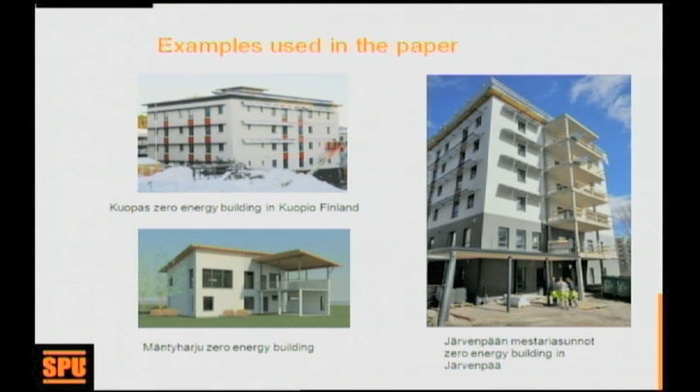I will present shortly a case study, an example of implementing a near zero energy building in Finnish climate conditions. Here you will see 3 examples of such buildings that have been recently implemented here in Finland. All of them are described in my full paper, but I will now concentrate, for the sake of time, on the Kuopas building, which you see here on this picture in the upper left-hand corner. That building is an apartment block building, apartments for students.

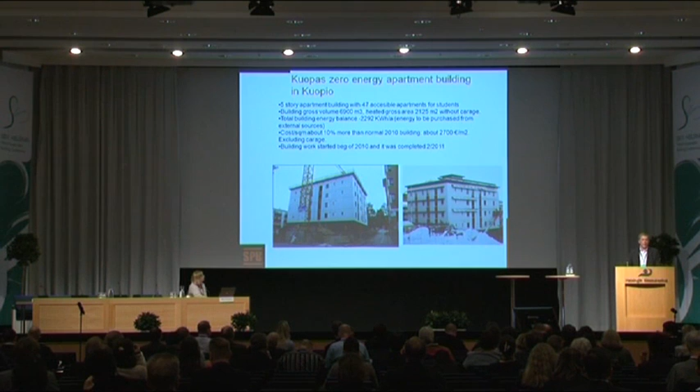It's a reasonably large building to be a pilot building, but in any case, the cost of implementing this building was 2,700 euros per square meter, about 10% above what we would typically have in Finland for a building which fulfills the current building code. So that's what the building is like.

I will just briefly talk about the structural solutions used here. It's a very typical Finnish apartment block building: concrete sandwich element walls, hollow slab roof, in principle very similar to many apartment block buildings in Finland today.

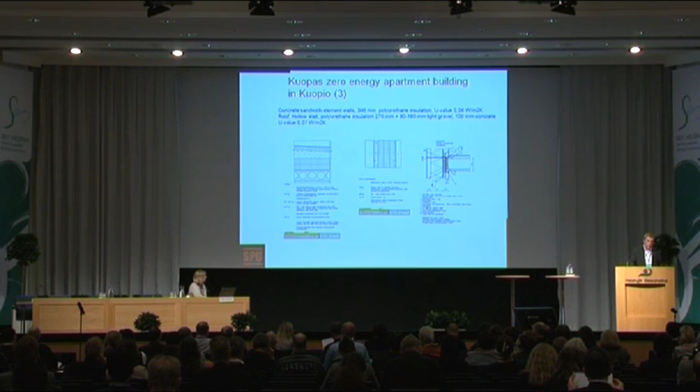The difference here is that the building envelope has extremely low U values. The roof has 0.07 and the walls 0.08. The air tightness of this building was measured to be less than 0.4 times per hour. Typical structures, the insulation material used here is polyurethane, to keep the structures reasonably thin and also to achieve good hygrothermal performance of the structures.

There you see a couple of pictures from the building site when the elements were installed. Typical sandwich elements, as you see there on the left-hand side picture.

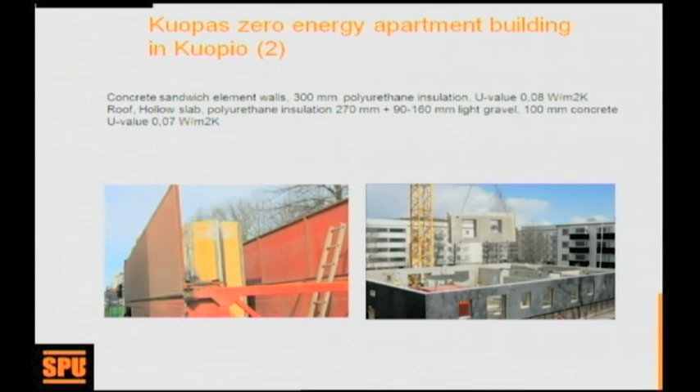Now, how does the building then produce energy? It has a little bit over 100 square meters of photovoltaic panels and 125 square meters of water heating solar panels. In addition to that, it's using geothermal energy wells - and you did hear that right, it's not using heat pumps, it's using energy wells to preheat the incoming air during the winter time, and then cooling the air during the summertime.

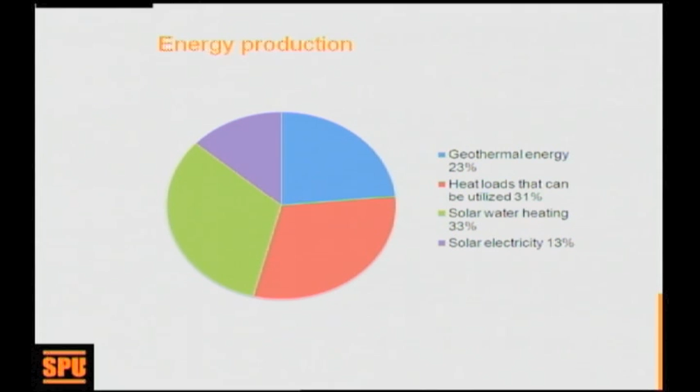The total energy balance of this building is a little bit less than 2.3 thousand kilowatt hours per year, and this building was implemented in an environment where the annual average temperature is less than 3 degrees. So it's a reasonably harsh environment for building a zero energy building.

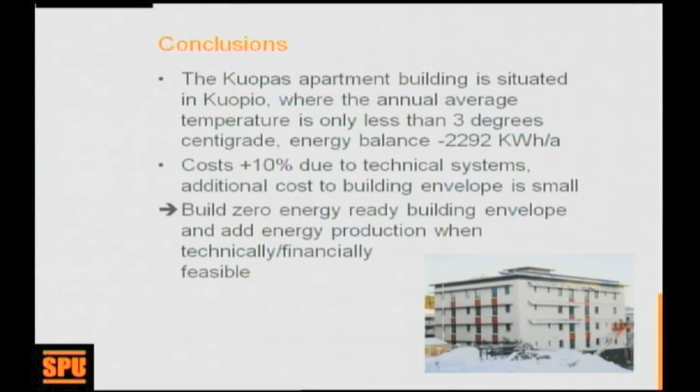Costs, which we are all of course concerned about, were in these pilot buildings about 10% more than in a typical building for similar purpose implemented in Finland, and mainly this is due to the technical systems, i.e. the energy production on site.

What I would suggest from the study of these buildings and a number of other buildings is that most of the cost when we implement zero energy buildings today goes into the energy production, implementing the energy production on site.

So I think some of the considerations we should put into is producing renewable energy for building groups or smaller areas, and also for the fact that the energy production could also be introduced in a later stage for these buildings. Make the building envelope capable to support zero energy building, but if there is a lack of financial resources in the building phase, implement the technical systems to produce electricity and other energy in a later stage.

So that would be my conclusion from here. But as said, these buildings were implemented over the last 2 years in Finland, and I hope that we will have more experience also from the actual users of these buildings to tell in the next conference. Thank you.

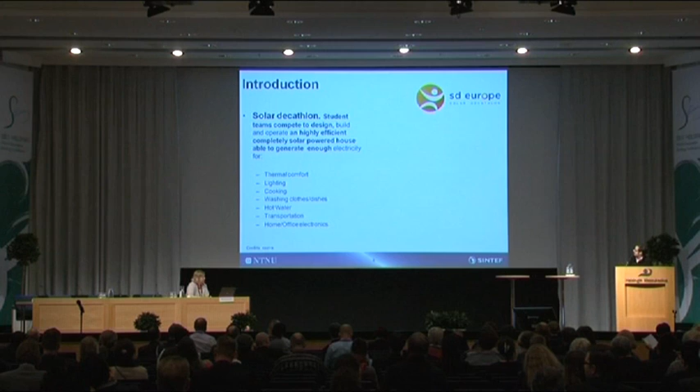The aim of this competition is developing a prototype that is energy positive, thanks to the integration of different photovoltaics, but also satisfies a whole bunch of different requirements.

In the Solar Decathlon, students compete to produce a highly efficient, completely solar-powered house, able to generate enough electricity for all kinds of domestic activities normal in any house. It provides thermal comfort and sufficient lighting requirements, but also the students, when we're there next year, will have to wash clothes, invite people for dinner, and do a whole series of things like it's a real, normal house.

The house will be evaluated under 10 different contests. The energy balance, which I'm going to speak about today, is just one of the different requirements under which the house will be evaluated. In the energy balance and solar systems category, but the jury will also evaluate aspects like the architecture, the aesthetics of the house, and also the communication and social awareness — how the project was used to increase social awareness about the use of photovoltaic technologies, and the strategy used in the competition.

As you could imagine, the house we were asked to develop should have been market-ready for our country — a Scandinavian house somehow — but should have been able to perform optimally in Madrid, meaning a completely different climatic context.

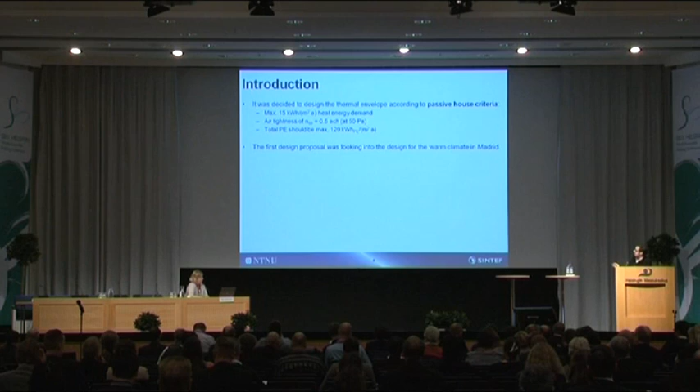We started designing the house looking at the passive house standard requirements, and as a first step we tried to understand how the house could perform according to passive house standards specifically in Madrid. Here are the requirements we had: 15 kilowatt hours per square meter of heating demand and cooling demand, and a total energy demand of 120.

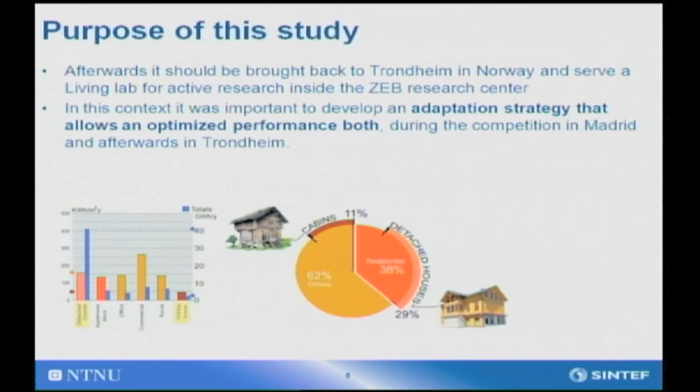The main challenge was that after coming back from Madrid to Trondheim, the house will actually be used next year as a research living lab for ZEB, the Zero Emission Building Center. So the adaptation strategy for allowing optimized performance was crucial.

The other difficulty came from the requirements of the competition, like the fact that we were dealing with a really narrow comfort zone — we're asked to maintain comfortable conditions between exactly 23 and 25 degrees centigrade, and relative humidity between 40 and 55 percent. If we want to score points next year competing with other universities, we have to stay within this range of values, so the challenge was pretty high.

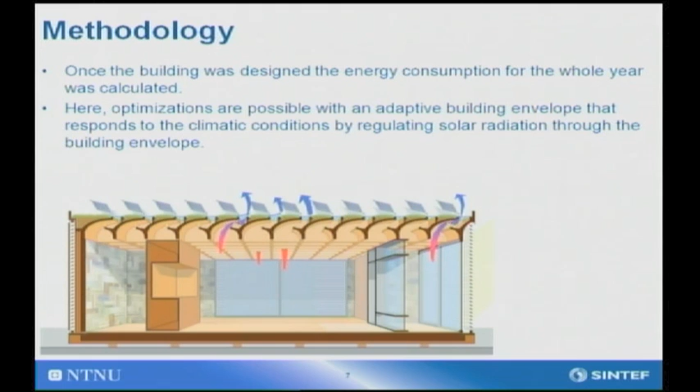The methodology used in the architectural design was to design a building characterized by different layers — a multi-layer envelope that could work in different ways according to different seasons.

When we performed the calculations, they satisfied the passive house requirements in Madrid, but didn't satisfy the passive house requirements in Norway. So we started applying an adaptation strategy following the Kyoto pyramid: first reduce heat losses through the windows, then maximize solar heat gains, then reduce the transmission losses through the walls, floor, window, and roof.

That means Matthias defined 4 different models with 4 different groups of parameters, which I'm going to run through and then go back to — these ones.

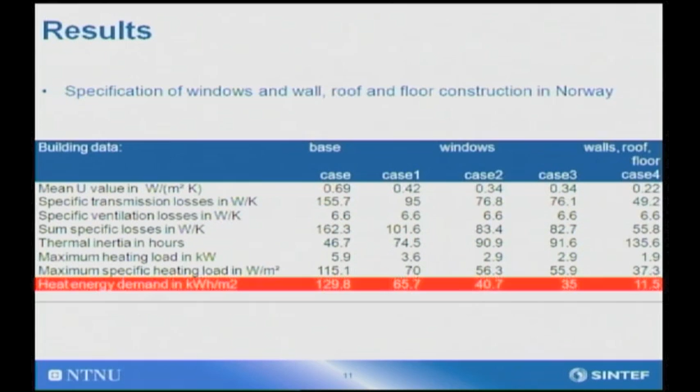So these were the parameters used for the simulations in Madrid, and then 4 different groups of new parameters for the Norwegian context with more and more stringent envelopes. The U value was going down and down until reaching the mean U value of 0.22. For more detailed values, you can refer to these tables. But basically, for the Madrid building we have a U value of 0.25 watts per square meter Kelvin.

And then air tightness was down to 0.07, and so on. So I'll just spend a couple of words on the concept. As I told you, the main idea was to have somehow a really regular box. Now the project has slightly changed, but this was the original idea, characterized by high mobility of the external envelope. We had 3 different layers of devices, and all of them were movable. The first one was characterized by a shading device and also movable insulation, and the most internal layer was also able to translate in this direction.

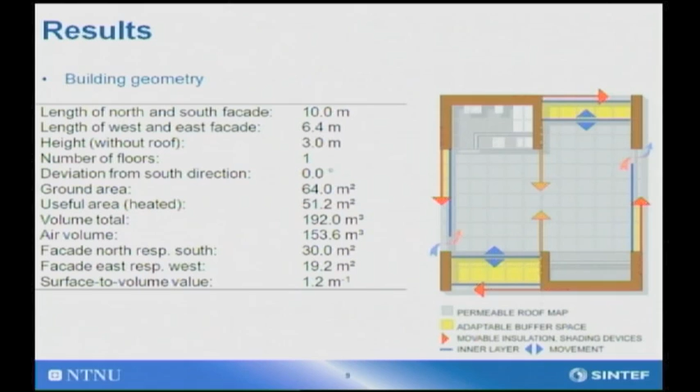In this way, we were trying to solve the contradiction of having a passive house, Scandinavian performance that was also asked to work in Madrid. Basically, we were somehow cancelling this layer when we wanted a greenhouse effect, or moving this one here when we wanted a double skin facade, etc. But obviously this was constructively really complicated, so now we are moving to another kind of stage. If you want to know more about this project, please ask us — I don't want to take too much time now to go through all of it.

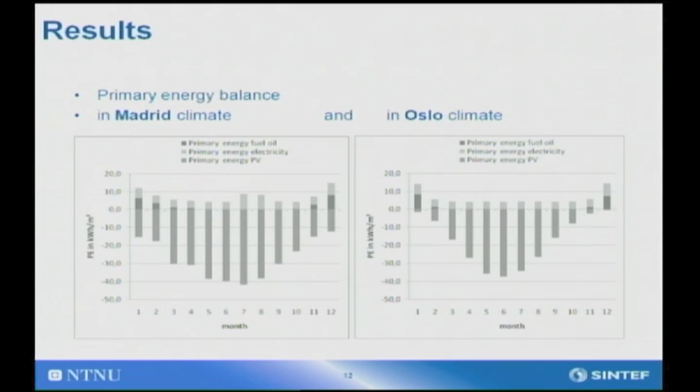But anyway, the prototype showed that it's possible to have energy positive buildings also in this climate. I'll just mention that the maximum power of the photovoltaic systems applied comes from the competition requirements — we have a 10 kilowatt maximum power all around the year. And then let's go on.

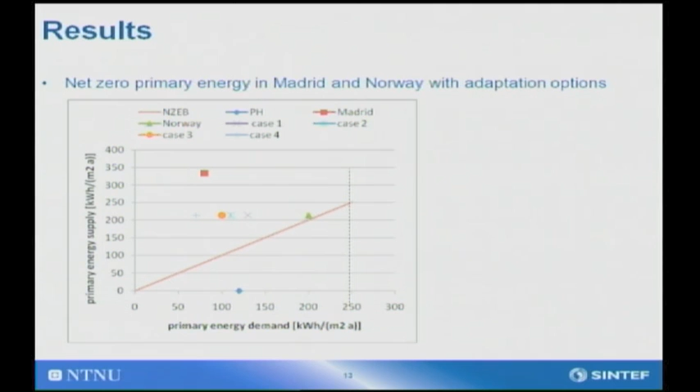So if we try to summarize these results into a final diagram, this is what happened. 120 is the limit we had for passive house requirements. This one is the Madrid building, and as you can see, here we have the energy supply coming from the PV, and here the energy demand. So we are still always inside the 120, and we have a pretty high production thanks to the PV integration. This line you see here at 45 degrees represents net zero energy, so basically it's when the demand balances the energy production.

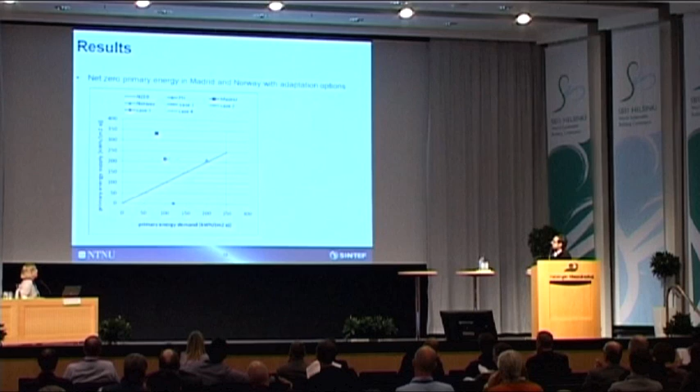So all 5 buildings that Matthias analyzed here — 1, 2, 3, 4, 5 — are somehow over the line. But there is one, the first case, where the envelope of the building was not yet that stringent, so it doesn't yet satisfy passive house requirements — that's this one. All the other 3 that were simulated do meet passive house requirements, but obviously the result for the Norwegian context is that the most stringent one, the one with the lowest U value, is the most efficient one.

So, I don't know if I'm running too much. Didn't calculate — no, it's okay. So a little bit about the conclusions.

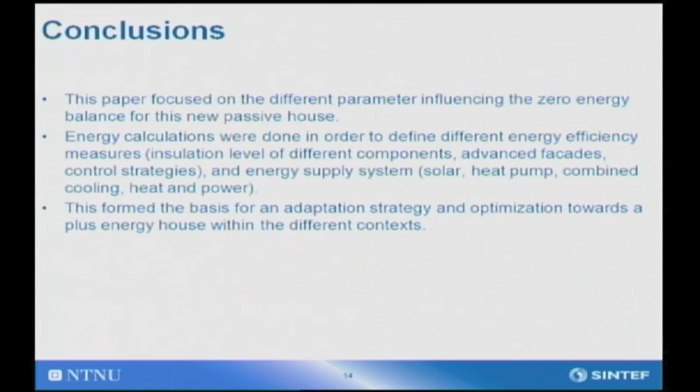The energy calculations done here focused somehow on 2 systems: one is the envelope system, so the characteristics of the envelope and the U values, the degree of insulation, and the other is the energy supply system. This formed, as I told you, the preliminary set of analyses done with the original concept. Now we are in the 4th stage of development of the project, so there is a new set of analyses that have been done also with other software.

And the results show that it's indeed a challenge, designing a house that performs in both contexts, satisfying passive house requirements in both of them. It's difficult, but what I want to stress a little more is that these final two lines are really interesting for us, also according to what the Solar Decathlon competition asks us to promote.

So it's like that the results indicate that solar applications integrated with other energy supply technologies should be further developed for the Norwegian market until they provide cost-effective solutions. What we are trying to show in our project is that there is a marginal applicability of these photovoltaic systems even in cold climatic contexts or where the solar angle is so low.

So that if we respect somehow passive house requirements for the energy demand, we can still have an energy balance all along the year. There are some discussions behind that, also with the provider of the PV panels, but we're working hard. This would represent a helpful result for the development of passive houses and net zero energy houses in our context. That's all.

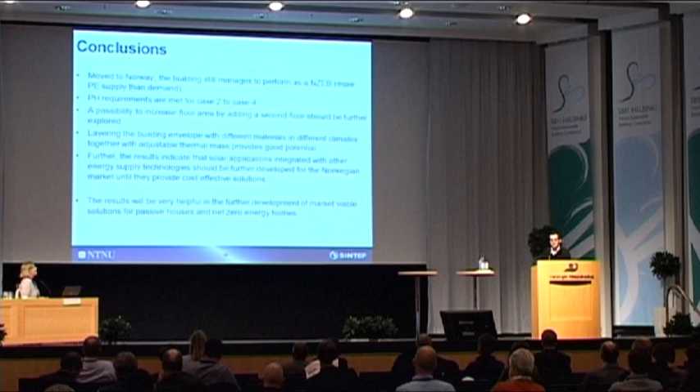Sorry, that's really interesting. It looks like the graphs show it's... Yeah, thank you, thank you. Can you all hear me?

That was a very interesting presentation, and it seems to me that the building in Madrid is much more challenging than the building in Norway, Trondheim. Presumably you've got active cooling specified. Could you just say something about the cooling systems? Because it's important to know how it's cooled in Madrid and how it's kept warm in Norway, and whether it's the same system.

Yeah, obviously, as you said perfectly, the requirements are completely different due to climatic context. So obviously in Madrid we have much more stress on the cooling and shading devices. On the other hand, in the Oslo climate, we have much more stress on limiting the thermal losses through the envelope. So that's a completely different approach.

But the point is that for Madrid we now have a slightly different strategy for solving this contradiction compared to what we presented. The focus on Madrid is having a hybrid system. Basically the thermal comfort zone is so small that it's not really easy to predict if the external condition, even if we are in September, will be inside that specific parameters.

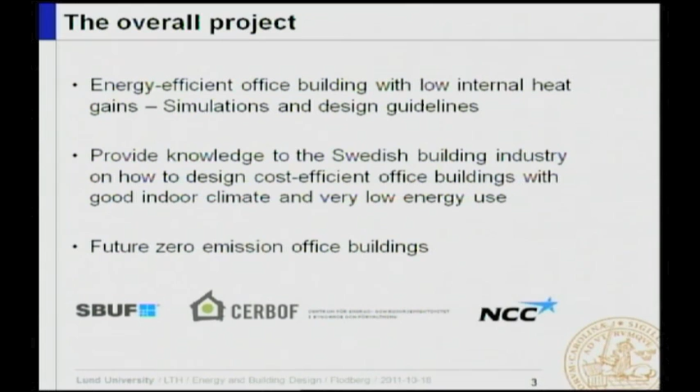Marie-Claude and I work together in a Swedish research project called Energy Efficient Office Buildings with Low Internal Heat Gains, Simulations and Design Guidelines. The overall purpose of this project is to provide knowledge to the Swedish building industry on how to design cost-efficient office buildings with a good indoor climate and very low energy use. We believe this is a first and important step for developing future zero-emission and zero-energy office buildings. The project is financed by the Swedish building industry, the Swedish Energy Agency, and a large construction company in Sweden called NCC.

The objective of this simulation study is to investigate the daylight potential in single office rooms in the Nordic countries, that is, countries at high latitudes. We want to see the potential for electricity saving for lighting, and the goal is to provide guidelines for architects and engineers.

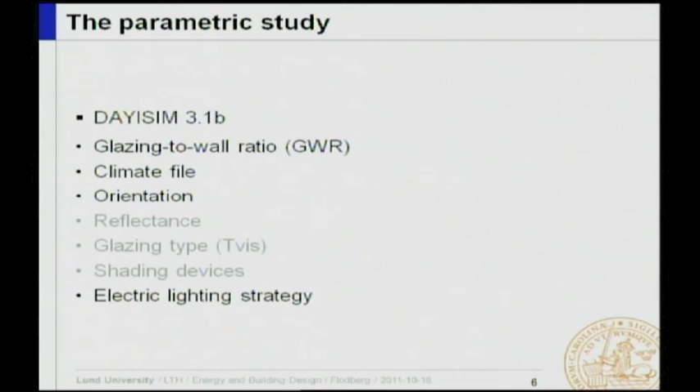In this parametric study and simulation, we use the simulation tool DaySim. In DaySim we can change parameters such as the glazing to wall ratio, different climate files, the orientation of the room, the reflectance of the inner surfaces, the visible transmittance of the glazing, different shading devices, and the electric lighting strategies. The ones in black are the results I will give you today.

First, we modeled a base case in DaySim: a single office room in Stockholm, facing south. In the base case, the glazing on the wall is 30%, and the visual transmittance is 72%. The reflectance of ceiling, walls, and floor are 80%, 70%, and 40% respectively. We assume the office room is occupied from 8 to 5 every weekday.

In this picture, you can see the different illuminance sensors placed in the room. The distance of 1.5 meters from the window is the preferred sitting zone.

In this study, we analyzed the continuous daylight autonomy, which is a factor of how much available daylight you have in a room compared to the required illuminance. For instance, if we want 500 lux in the room and we have 400 lux from daylight, then the daylight autonomy is 80% for that time step.

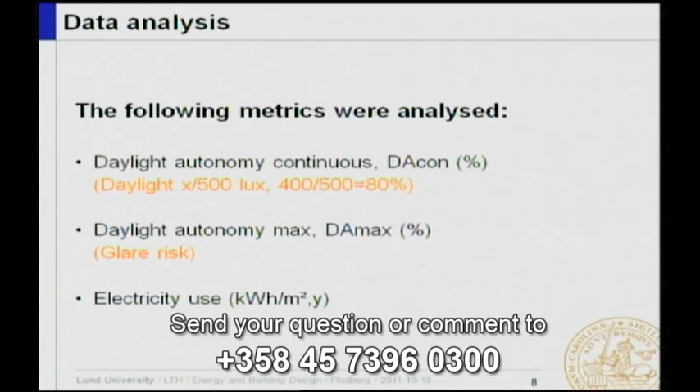We also studied the daylight autonomy max, which is the percentage of time during a year when we have too much daylight in a room, posing a risk of glare. We should keep this below 5%. We also studied the electricity use for lighting systems.

I will now try to guide you through some of Marie-Claude's results. Here you see the daylight autonomy as a function of glazing to wall ratio at different distances from the window. I want you to concentrate on this gray curve.

As you can see, the daylight autonomy increases sharply from 10 to 30% and then stabilizes. At 30% glazing to wall ratio, we have 78% daylight autonomy, which is at the borderline between good and excellent.

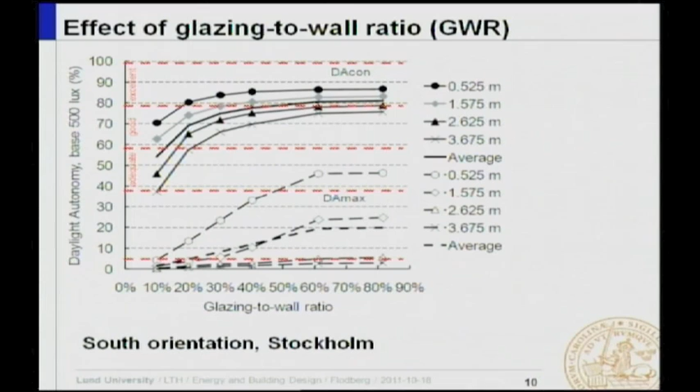If we look at the glare risk down here, remember we don't want glare risk more than 5% of the year. Above 20% glazing to wall ratio for this preferred sitting zone, 1.5 meters from the window, we will have a glare risk and will need shading devices.

We also investigated the effect of climate in relation to glazing to wall ratio. This study included Montreal and Quebec, which are at a lower latitude than the Swedish cities Stockholm, Gothenburg, Malmö, and Östersund. In Quebec and Montreal, we have more daylight benefit in the room, actually excellent, but we have good daylight in the Swedish cities as well.

The differences between Gothenburg, Stockholm, and Malmö are negligible, but in Östersund, further north of Stockholm, we have a little bit more limited daylight, though still quite good.

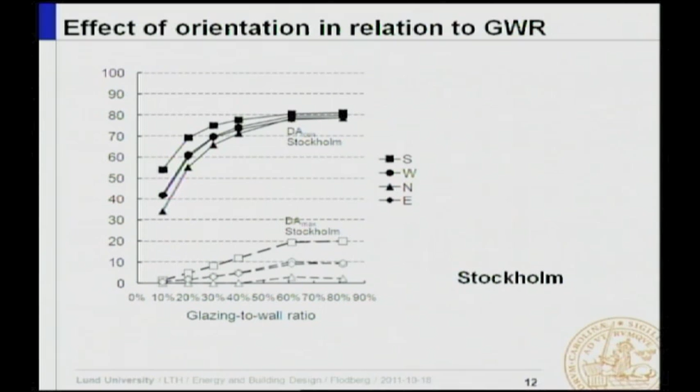This graph shows the effect of orientation of the room. As expected, we have more daylight in the south orientation and less in the north orientation, with the same daylight amount in the west and east directions.

Looking at the glare risk, remembering the 5% limit, at the south facade we have a glare risk already at 20% glazing to wall ratio, but at the west and east facades it's at 30%, and at the north facade we can manage without shading devices.

This is because the occupancy sensor turns the light on every time you enter the room. So between 8 o'clock and 5 o'clock every day, the lights are turned on even though we have enough daylight. Instead of an occupancy switch-on-and-off system, we should have an occupancy switch-off system, which turns the light off when we walk out of the room, and when we enter again we manually switch the lights on.

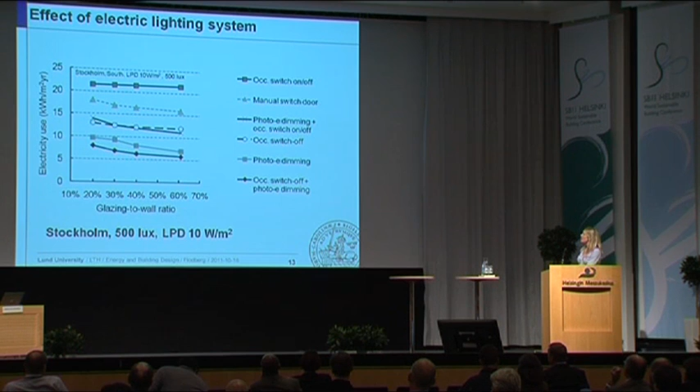If we have enough daylight, we won't switch on the lighting, and we will save energy. The best control strategy is to combine this occupancy switch-off with a photoelectric dimming system, which adjusts the lighting. If we have much daylight in a room, we can dim and adjust the lighting electricity.

And I will end this presentation with some main conclusions from this study.

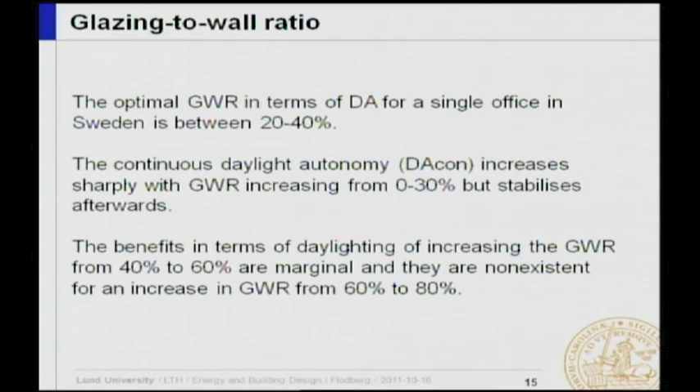The optimal glazing to wall ratio in terms of daylight autonomy for a single office room in Sweden is between 20 and 40%. The continuous daylight autonomy increases sharply with glazing to wall ratios increasing from 0 to 30%, but stabilizes afterwards. The benefits in terms of daylighting of increasing the glazing amount from 40 to 60% are marginal, and they are non-existent for an increase from 60 to 80%.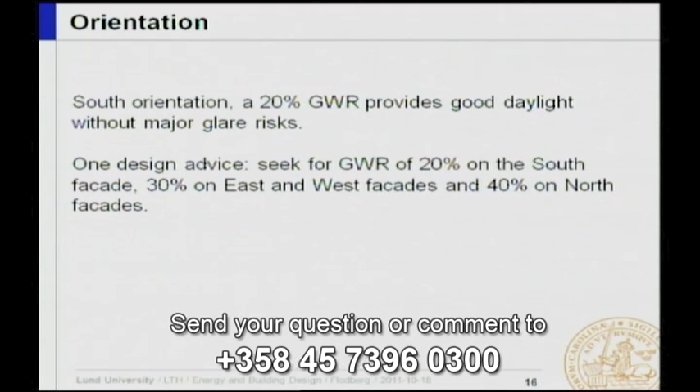At the south orientation, a 20% glazing to wall ratio provides good daylight without major glare risks. One design advice is to seek glazing to wall ratios of 20% for the south facade, 30% for the east and west facades, and 40% for the north facade.

Daylight autonomy is more limited in the Swedish cities compared to cities at lower latitudes like Montreal and Quebec. But it is still possible to achieve good to excellent daylight design with reasonable glazing to wall ratios in Sweden.

There are negligible differences in daylight autonomy between the three largest Swedish cities, and Östersund has a slightly more limited but not significantly lower daylight autonomy than Stockholm, Malmö and Göteborg.

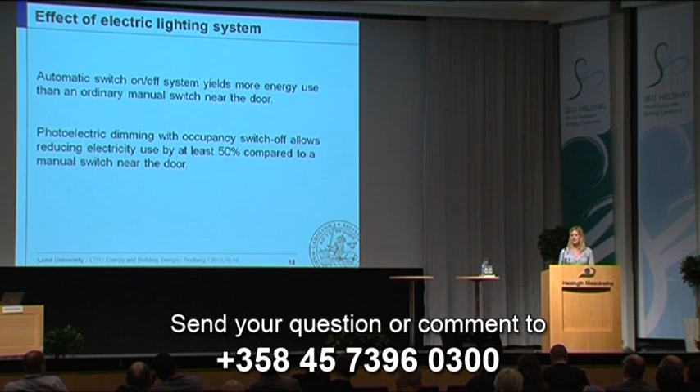A more detailed journal article will be presented in the next issue of Lighting Research and Technology. If you have questions about this and want to know more detailed results from this study, please don't hesitate to contact Marie-Claude Dubois at this email address. Thank you.

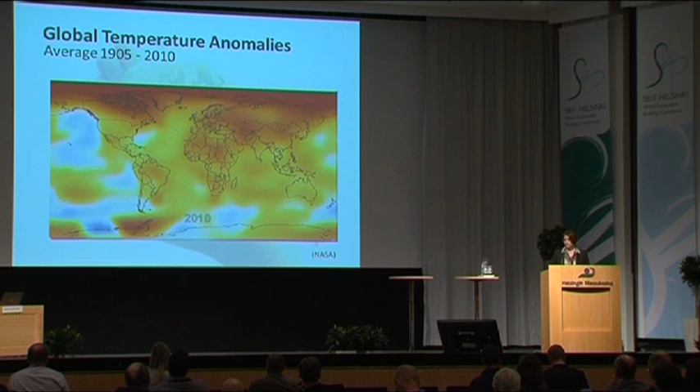So the greenhouse gas effect has resulted in the increase of global temperature all over the world. And if we continue like this, this will cause serious implications on Earth. So this will threaten life on Earth.

And the major gas contributing to the greenhouse effect, as we all know, is CO2, carbon dioxide, resulting from the burning of fossil fuel to generate energy for different buildings. As we can see here, domestic buildings are the major contributors to carbon emissions in the UK.

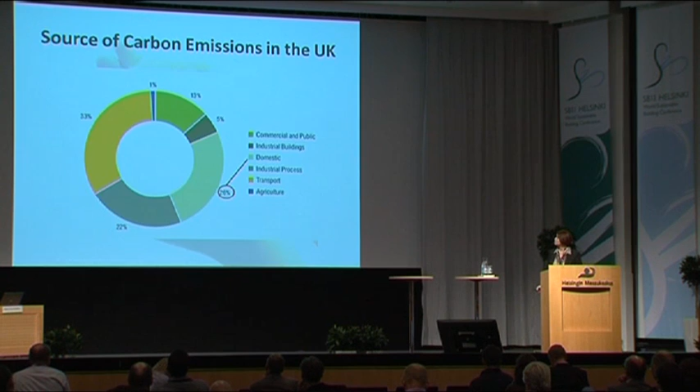This is because of the use of burning fuel to generate electricity, which has resulted in buildings becoming energy inefficient, because of the mass exploitation of fossil fuels.

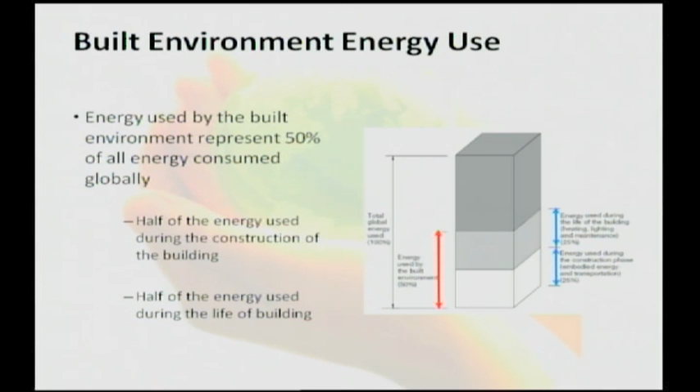In the built environment, 50% of the energy used is used by buildings, whereas 25% is used during the construction phase, and the remaining 25% is used during the occupancy phase.

The major components causing CO2 emissions are the materials used, over-ordering of about 10% of material, and consequently waste. This has led to buildings being a commodity-led, demand-led property, constructed with shorter lifespan, and dominated by mechanical, electric, and electronic equipment.

So the built environment, we've all agreed, has a lot of problems, and these problems have been well documented in literature. In order to mitigate these problems, too many separate yet overlapping initiatives have been introduced, and this has led us to question the credibility of those initiatives.

What is the construction industry supposed to be doing? Is it supposed to be following this initiative? And if it's not following it, is it neglecting the other one, or what?

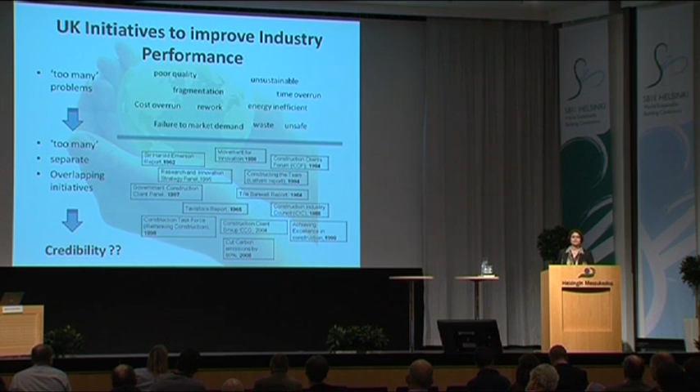One of these initiatives is changing the perception of the building as a commodity and looking into more sustainable features of the building, which determine the worth and the market of the property.

And one of these initiatives is the initiative by the UK government to cut carbon emissions by 80%, which is quite ambitious.

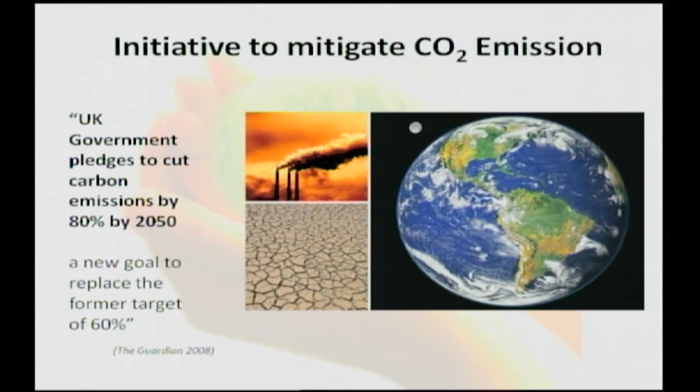That means using renewable energy technologies with different features, whether solar, wind, or biomass technologies, where biomass represents the major source for renewable energy.

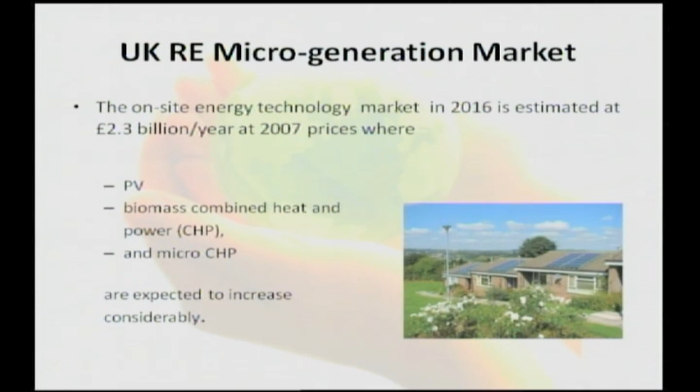The microgeneration market in the UK is anticipated to be dominated by photovoltaics, and biomass combined heat and power, CHP, are expected to increase considerably.

Okay, how do we perceive renewable or energy efficient buildings integrating renewable energy technologies? This has been well documented by Louis Hellman back in the 80s, and to some extent it hasn't really changed a lot nowadays. It depicts the developer as perceiving these buildings as funny - they take longer to build, are not cost effective, and in the end will go wrong.

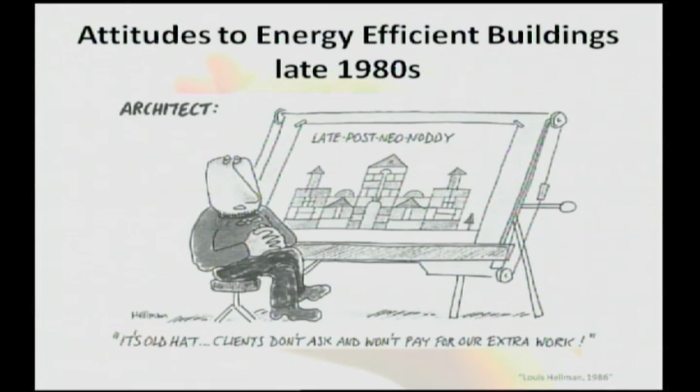The architect, since the developer will not pay for the extra work, is not bothered about integrating these because they're not going to get paid for it. As for the landlord, the rent won't rise because of using these technologies, and they pass on the electricity bills to the tenants, so they don't see themselves as involved.

And the tenant - they don't want to waste their time saving peanuts on energy. And finally, the people in the work environment would perceive this building as oppressive, because they have to take care of each and every element to save energy.

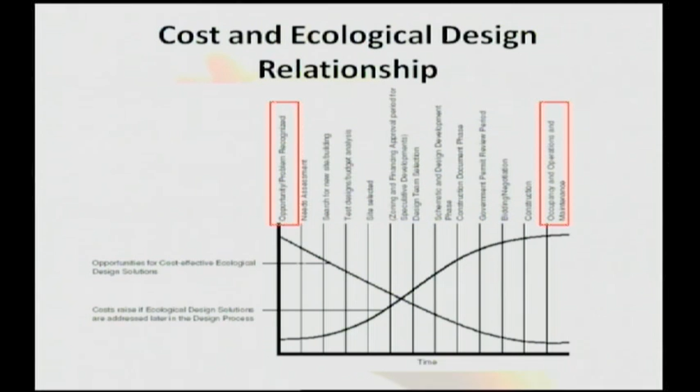So it is anticipated that the inclusion of renewable energy technologies into the building from the outset would help make the buildings more energy efficient and acceptable by the users.

It is estimated that inclusion of those technologies would increase the investment by 2%, whereas the life cycle savings would reach 20%, which is 10 times the initial investment.

Great, so the problem now - we know where the problem is and we know the solution. Let's integrate these early on in the building.

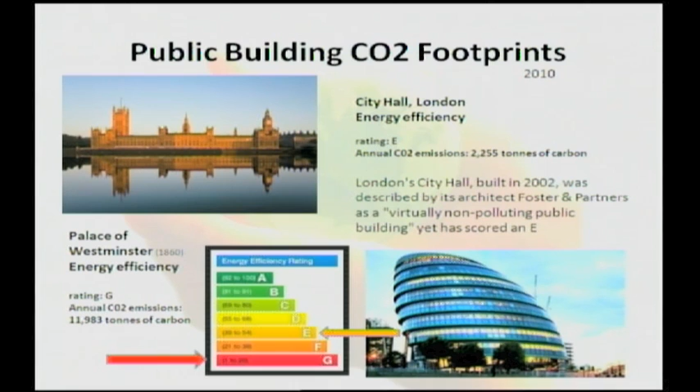But now we have two different examples, one that was built back in 1860, and the other one built in 2002. Both of them were rated as energy inefficient, although the new one was described by the architects as a non-pollutant building. So we do have a problem, but what is it actually?

This problem has been emphasized by Minister Andrew Stunell, saying there is a concern that energy efficient buildings or zero carbon buildings may become an empty slogan because of industries failing to build according to the standards. But is it because the industry doesn't want to follow the standards, or are there other problems?

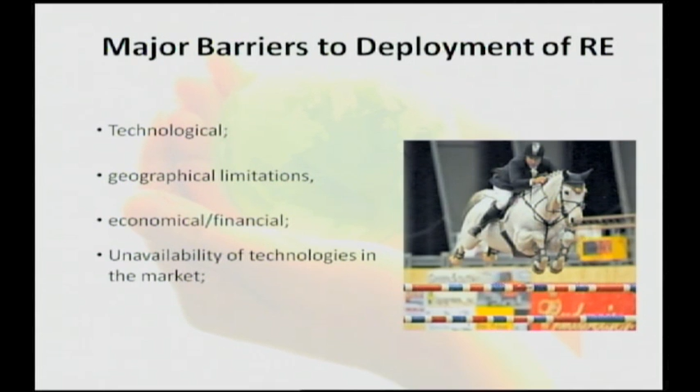In our paper, we've identified a number of barriers for the wider implementation of renewable energy, which could be technological, geographical, economical, or due to suitable technology not being available in the market. This has led to the concern that renewable energy technologies are bolted onto buildings, on the roof, causing damage to the building, and the technology is perceived by users as unreliable, unfeasible to integrate, with no consideration to space and aesthetic requirements, and therefore believed to be installed to the detriment of profits.

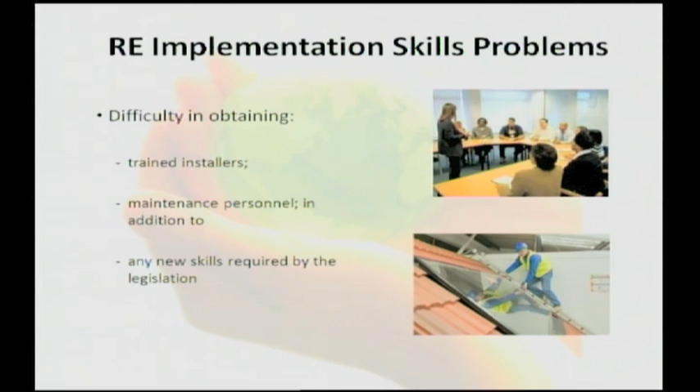Another serious problem is the skills problem, which the UK construction industry is suffering from. When integrating renewable energy into buildings, there is difficulty finding the proper skills for installers and maintenance personnel, and any other skills that may be required by the technology itself.

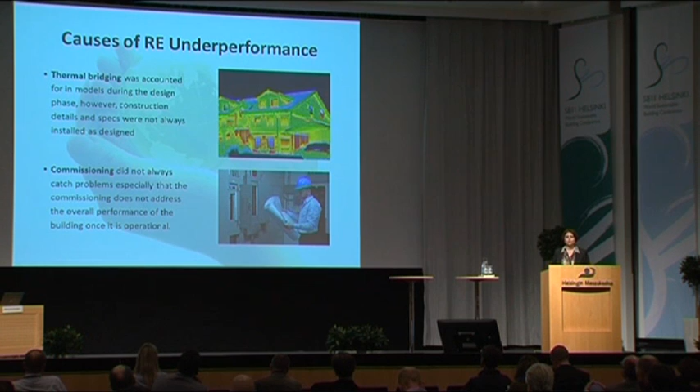The causes for the underperformance of renewable energy technologies could be that the design team was too optimistic about the behavior of end users operating the systems. Computer simulations created idealistic controls, but actual performance varied and energy requirements were higher than predicted. Thermal bridging, although considered during design, is not necessarily followed in actual construction. Most importantly, commissioning doesn't look at testing the building as a whole after operation, rather testing is done for individual technologies.

There is a serious challenge with regard to existing buildings, because they will still be operational by 2050, but new buildings are another challenge, and if we don't take these into consideration, we'll add to the problem of the existing stock. Therefore, the UK government has called for use of modern methods of construction to meet market demand, which the government is constantly failing to meet.

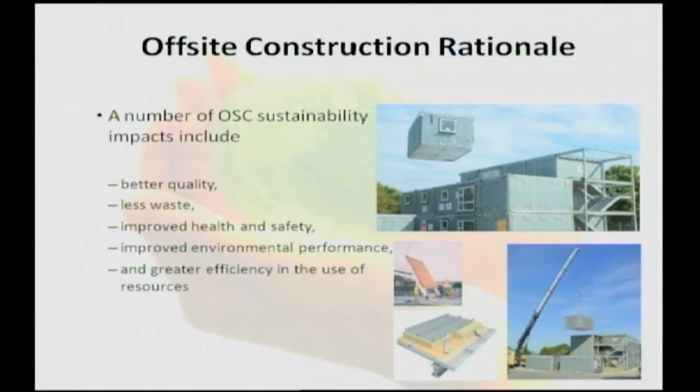Therefore, off-site construction is perceived as being able to provide better quality, less waste, improved health and safety, and greater efficiency in the use of resources.

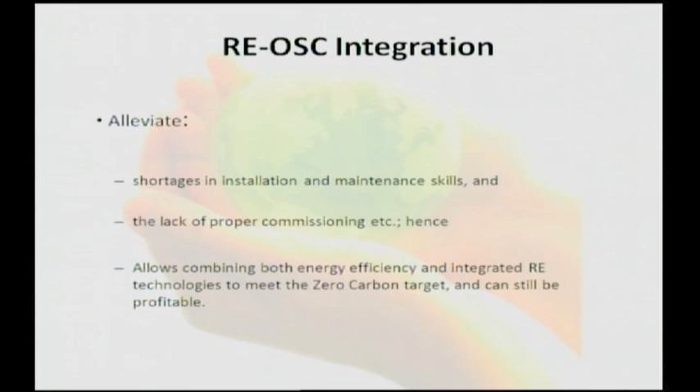Renewable energy technologies are more than just slapping technologies on top of the roof. They're rather complex technologies that need to be integrated and require specialized skills. Therefore, the integration of off-site construction and renewable energy is claimed to alleviate the shortages in skills and the lack of proper commissioning. By combining energy efficiency, because of the controlled working environment, with renewable energy technologies, we would have the chance to meet the target.

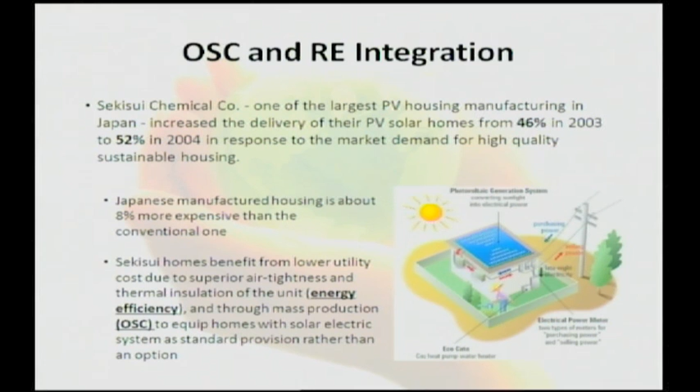Finally, there is a case presented in Japan where a building integrating off-site produced construction with renewable energy technologies was profitable, because they managed to benefit from cuts in electricity bills, and mass production also helped decrease the cost of providing renewable energy technology, solar panels, to the building as a standard rather than an option.

Further research is required to prioritize the challenges facing the implementation and wider use of renewable energy in the market, in order to help address these in due course, and to look into the difficulties of retrofitting these technologies into existing buildings, not to mention off-site produced buildings, because if they're not integrated with the buildings when produced off-site, this will cause other problems with regard to energy efficiency.

In the end, I would like to thank you for your attention. I'm sorry about this automatic presentation. Thank you very much.

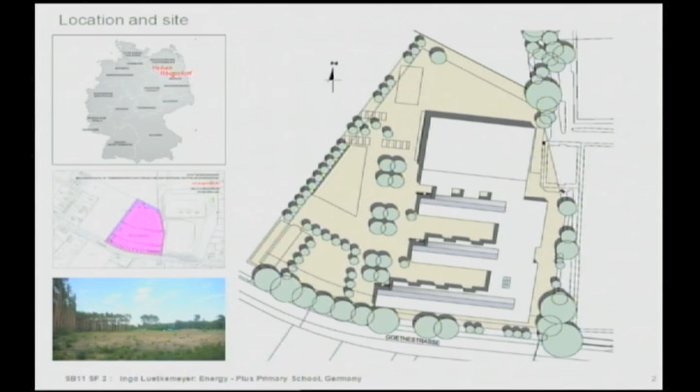Hohen Neuendorf is located north of Berlin, part of the metropolitan area. The site is close to sport facilities, near a kindergarten and residential areas. The building comprises a primary school with an integrated triple-field sports hall.

The primary school is designed for 540 children and has a gross floor area of 7,400 square meters. A central school avenue connects the two entrances with all functions of the building.

Administration and teachers' rooms are located near the main entrance. The classrooms are grouped in three wings and oriented to the south. Specialist rooms for arts, music, computing, nature sciences, a small library, and a cafeteria are oriented to the east.

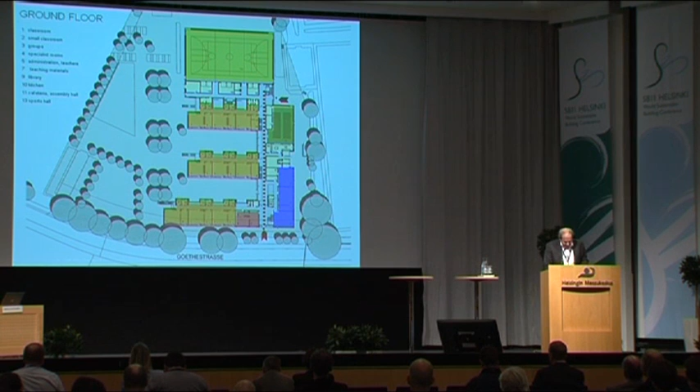The sports hall offers a floor area of around 1,200 square meters and is divisible into three parts. The first floor is organized in the same way: teachers' rooms, classrooms facing south, specialist rooms, and service rooms for the sports hall.

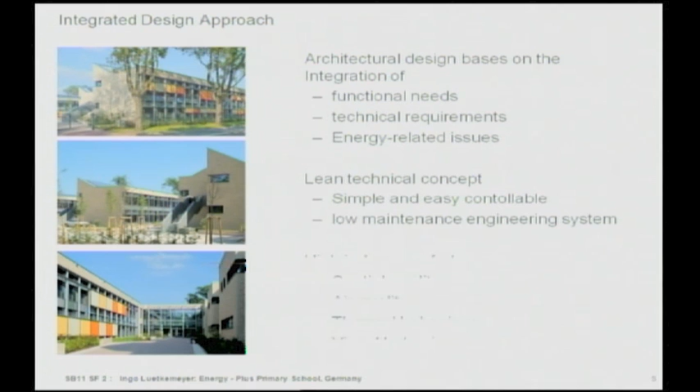An integrated design approach conceives all technical, energy-based and functional requirements as an integral part of the architecture, permitting a lean technical concept with a simple, easily controllable, low-maintenance engineering system for reaching high-comfort indoor conditions regarding spatial quality, air quality, thermal and visual comfort.

The Energy Plus concept was developed in close cooperation between architects and engineers. The main technical features are: highly insulated passive house standard, a newly developed hybrid ventilation concept, an optimized daylighting concept, the use of renewable energy sources, and the integration of innovative building components.

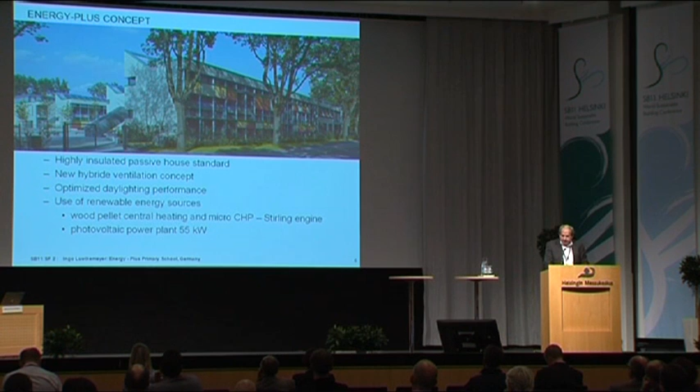In cooperation with the teaching team, a room concept has been developed that enables different kinds of teaching situations, the so-called home area. The home area consists of a multifunctional room in combination with a smaller teaching room, an extended circulation space, a wardrobe, and a sanitary unit for each class.

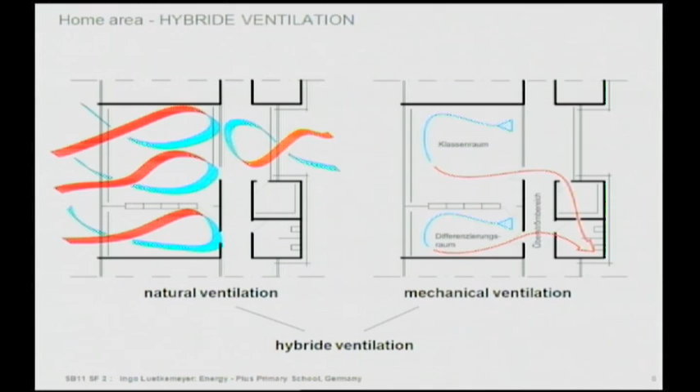The technical concept for ventilation and lighting is based on this room concept. By grouping the classroom and sanitary unit into a home area, a combination of natural and controlled ventilation can be realized. The advantages of both ventilation types are combined into a so-called hybrid ventilation concept to create a good balance of thermal comfort, air quality, user acceptance, and energy efficiency.

Ventilation of the classrooms is primarily achieved by rapid natural ventilation during breaks using motor-controlled full-height vent windows. But with only this type of ventilation, CO2 levels increase quickly during lessons. Thus it is combined with a small mechanical ventilation for a slower increase of CO2 during lessons.

The supply air flow for the classrooms correlates to the amount of exhaust airflow needed for the sanitary units. The supply air is given to the classrooms. The extract air is taken from the sanitary units by using the circulation space as an overflow zone, supported by an air duct at the ceiling.

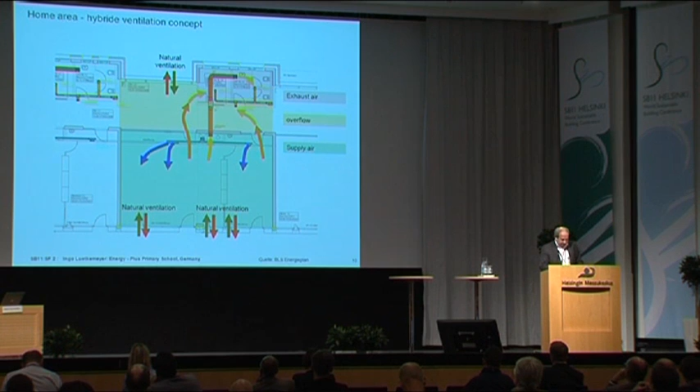Good thermal comfort in summer is achieved by means of passive night cooling using the motor-controlled vent windows, cooling down the large areas of thermal storage mass.

One research objective in the project is the trade-off between thermal storage in the concrete ceilings on one side and good room acoustic quality on the other. To achieve the best possible results for both requirements, the concrete ceilings are left uncovered for good thermal contact, and the biggest part of all available wall surfaces is covered by highly efficient broadband acoustic absorbers.

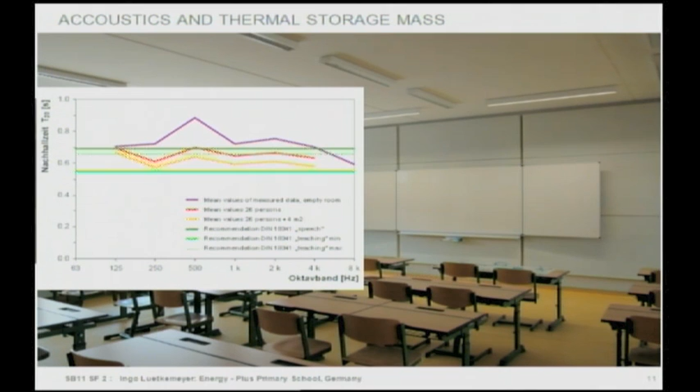Thus, a high room acoustic quality, according to the ambitious German DIN standards, can be achieved without affecting the passive cooling function of the ceilings.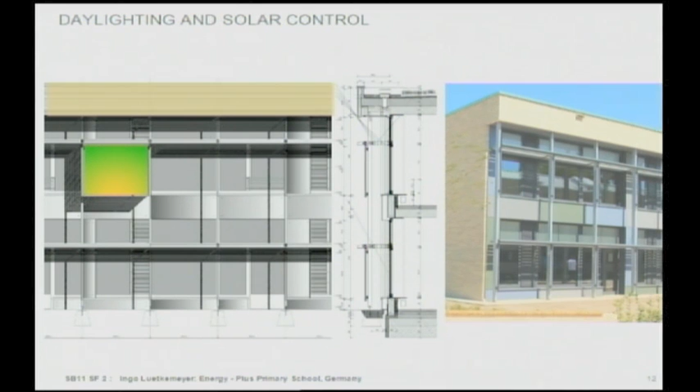The windows above the fixed blinds have nanogel glazing to diffuse daylight. Windows not equipped with external shading devices have integrated fixed solar shading and daylight guiding louvers. The external shading provides a shady atmosphere at the facade in summer, while a good view outside remains possible.

So the solar control and daylighting concept of the facade becomes an integral part of the architectural design.

Almost every space is designed to have a high daylight autonomy. The circulation spaces are well oriented to the daylight to provide attractive room quality. The use of bright colors supports the attractive appearance.

The daylight performance of the sports hall was also calculated, and the design was improved to achieve good and homogeneous daylight levels.

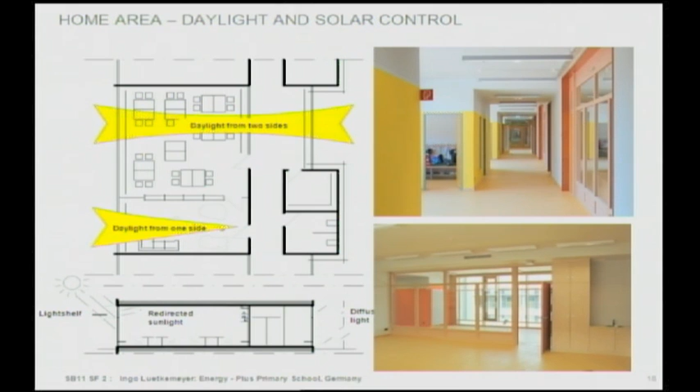As well as the daylight of the public spaces, the room layout of the home area was developed for the best possible daylight autonomy. The deep spaces of the classrooms receive natural light from two opposite sides, while the small rooms get natural light from one side only.

The building has a very good thermal insulation level that achieves the passive house standard. The U values of the opaque walls are between 0.11 and 0.15. The glazing is triple glazing with U values of 0.8.

The main structure of the building comprises concrete walls, concrete ceilings and a concrete roof for the school building, and a timber roof construction for the sports hall.

All the applied measures lead to a very low energy demand for the building. The calculated annual primary energy demand for heating, cooling and lighting is 23 kilowatt hours per square meter and year.

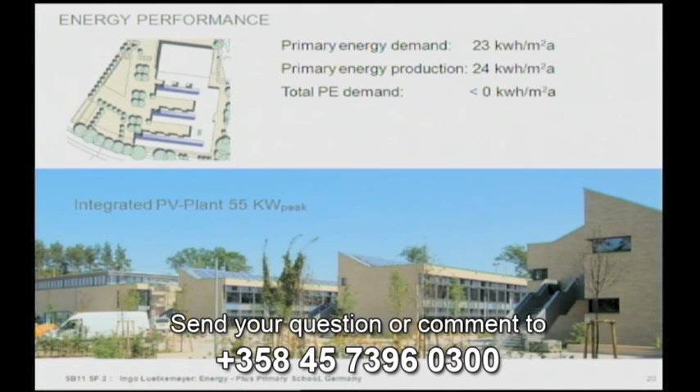A partial compensation of this need is realized by micro CHP, which is used throughout the year to cover the basic loads. For the compensation of the remaining primary energy demand, a building integrated photovoltaic solar power plant of 55 kilowatts is used. The annual primary energy production is 24 kilowatt hours per square meter and year.

The design phase of the project was accompanied by a life cycle analysis. The planning team was supported in design, construction, quantity surveying and evaluation by a tool for integrated life cycle analysis called LEGEP. The calculated operation costs for the school building are 70% less than the operation costs of a building of the same size and shape referring to the German standards.

The calculated life cycle costs are 25% less, and I think these are good news.

The building was finished in August 2011. A 2-year intensive and 5-year long-term monitoring program started to evaluate the building's performance and acceptance.

More information, you can find on these websites. And finally, I show you the team that was involved in this project. Thank you for your attention.

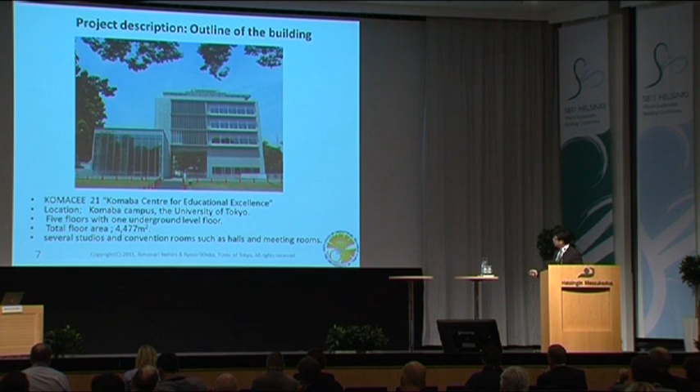This is the outline of this building: 5 stories above ground and 1 story underground. This building is located on our campus in Tokyo, and the total floor area is about 4,500 square meters, not so large, a middle-sized building.

This is the inside of the building. This building has a convention hall, an open space hall, a cafeteria, and several studio classrooms.

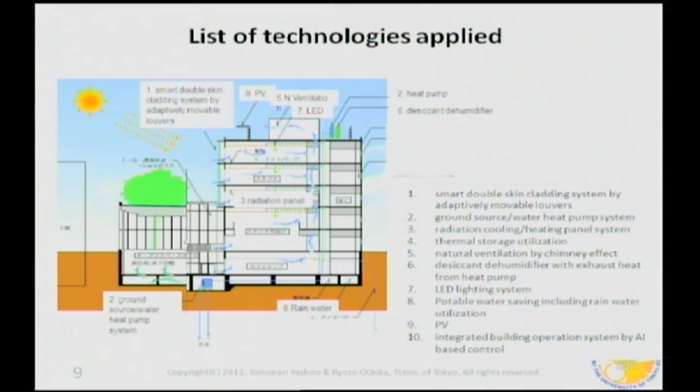This slide shows the list of technologies introduced here, the latest technologies from 2 years ago. Later, I'd like to explain them one by one.

So at first, I'd like to explain the smart double skin cladding system with movable louvers. This is a section of louvers, and this is also a section of louvers. This is a movable louver. One surface is painted white, and the other side is painted black. And this louver can be turned over.

So, for example, in the good season, this louver is opened, and in winter season, the black surface is outside, and in summer season the white surface is outside. And there are many punching holes in these louvers, so even if the louver is fully closed, we can still see outside.

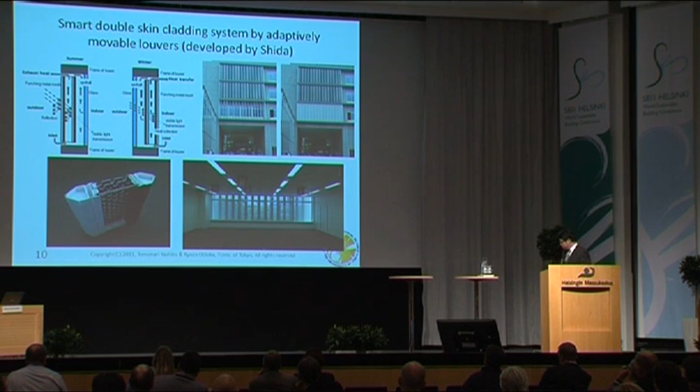So this is an animation. I don't know whether this works or not. Sorry. Okay, it's working. It's working. Sorry, it stopped. Sorry, so it doesn't work. So I'd like to skip this animation. I'm very sorry.

So I think they are trying to help you. Just a moment. Okay. So I'd like to show you the moving situation of these louvers. Okay.

This is in winter, so the black surface is outside. And this louver can be turned over according to the outdoor air temperature, humidity, and solar radiation. In summer season, the white surface becomes outside.

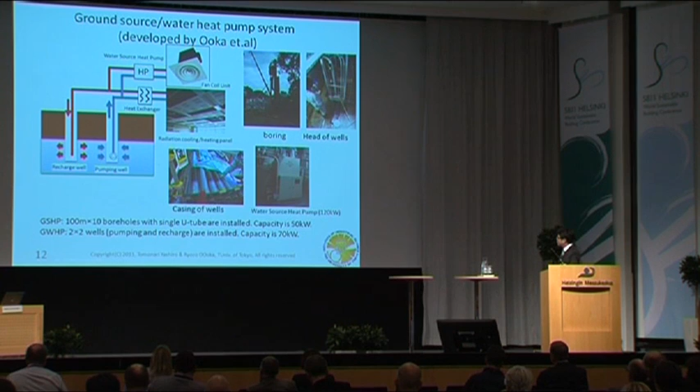In this building, ground source and groundwater heat pump system is also introduced. In Japan, in the Tokyo area, ground temperature is about 17 degrees Celsius, so we can use such ground heat directly for radiation cooling and heating panels, and also this heat is utilized for fan coil units through heat pump systems. For the ground source heat pump system, 10 boreholes of 100 meters are introduced, so capacity is 50 kilowatt. The groundwater heat pump system has 2 multiplied by 2 wells introduced, capacity is 70 kilowatt. So total capacity is 120 kilowatt, and this capacity is 1/3 of the peak value of the heat load of this building.

In this building, this slide shows the radiation cooling and heating panel systems. This is a ceiling set on the ceiling. Radiation panels can heat or cool a human body directly, meaning this system is more efficient than usual air conditioning systems. However, this panel cannot cover the peak load in the summer. In such a case, we utilize a combination of fan coil unit and radiation panel systems.

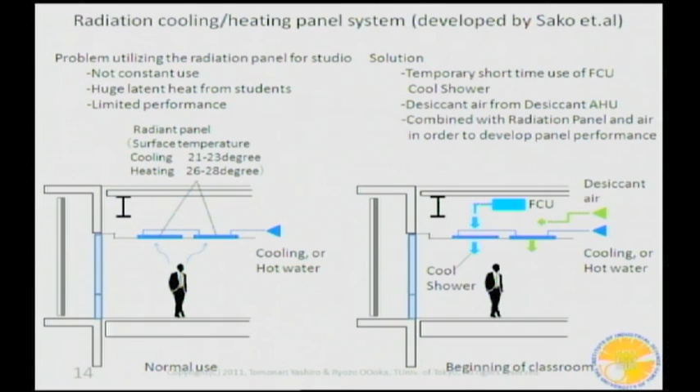And in this building also, a desiccant dehumidifier is introduced as an air handling unit, and exhaust heat from the heat pump is utilized as recovery heat for the desiccant rotor. And PV solar panels, total power is 30 kilowatt peak, are introduced. The total electricity production is about 375 gigajoules per year in primary energy.

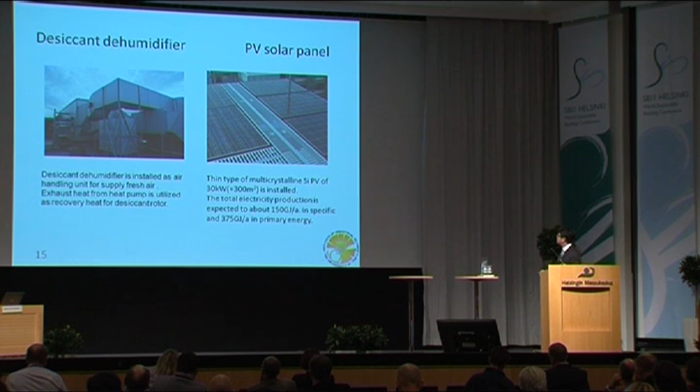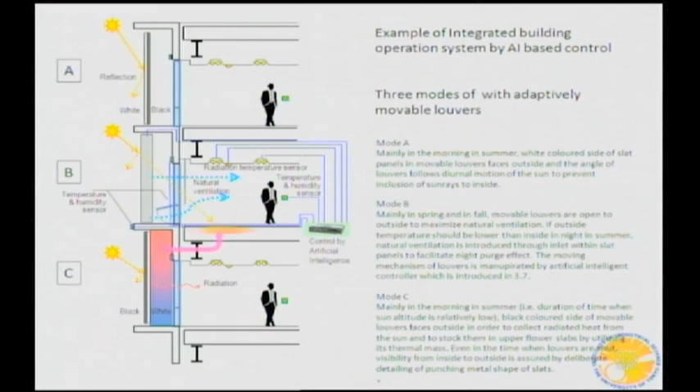In order to achieve the best combination of the previous devices, an integrated building operation system is required, and we have developed this system controlled by artificial intelligence. This is a very brief example of integrated building operation systems. In a traditional building, control of lighting, control of ventilating, control of air conditioning, and control of so many other things are controlled independently.

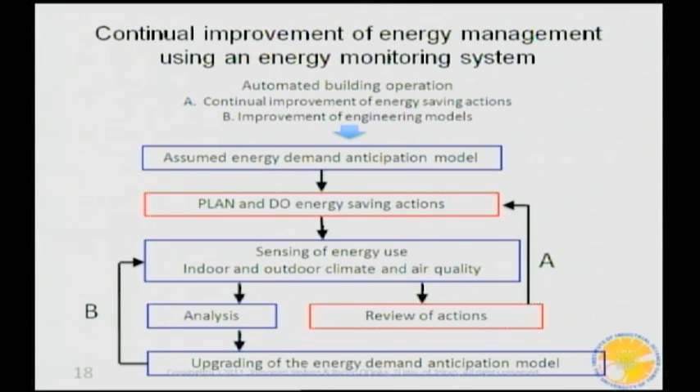But in this system, lighting, air conditioning, and opening the louvers are controlled simultaneously, and such operation is done by artificial intelligence. This system employs a learning process, very similar to the PDCA cycle. Through this cycle, the system can find optimum operation solutions.

Finally, I'd like to explain the roadmap for the achievement of net zero energy in this building. This is a reference value, reference energy consumption, and this value is the average value of our university: 1,800 megajoules per square meter per year. This is primary energy consumption. In this building, through the various devices, energy consumption becomes half.

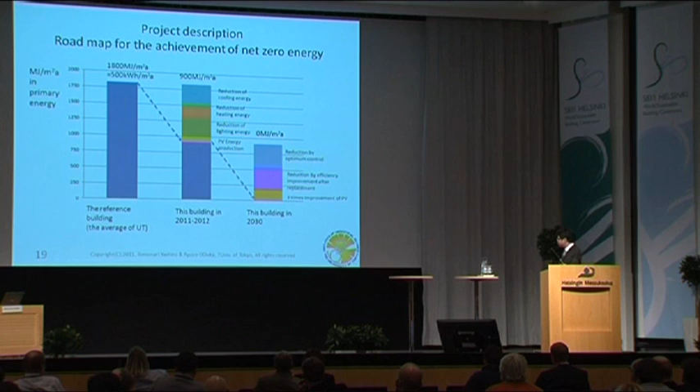This is at present. Until 2030, through the reduction from optimum control and improvement after replacement, and some assumption that PV performance improves 3 times, through this improvement, this building will achieve net zero energy by 2030. That's all, thank you very much.

Thank you very much. Are there questions concerning the presentation? Okay. Is everyone sleeping? Okay, no, that was a joke.

It was a really interesting presentation. You said that the energy use will be reduced 35% during the first 3 years in operation. Yes. Okay, so the PV and the other things were installed after the building was ready? Yes. Okay, what was the reason for that? Why were they not installed immediately in the building? Sorry, what's the reason? Yes. Why did you install the PV system and the louvers after the building was finished?

PV. Okay, so in order to achieve zero energy, we must produce energy. Okay, I think I misunderstood it. Yes. Okay, thank you very much. Okay, anything else?